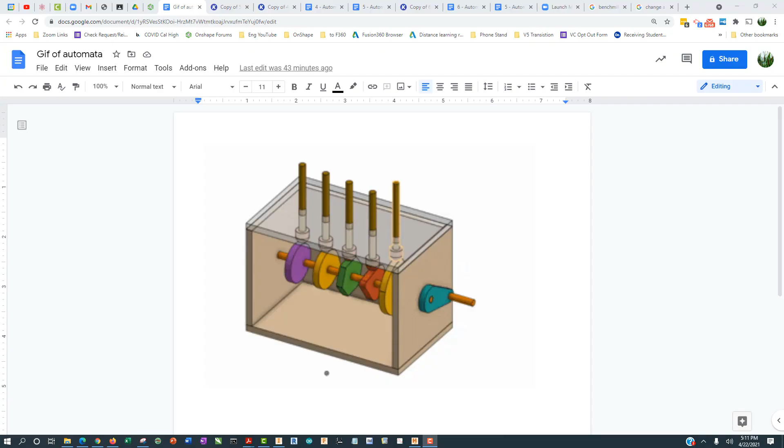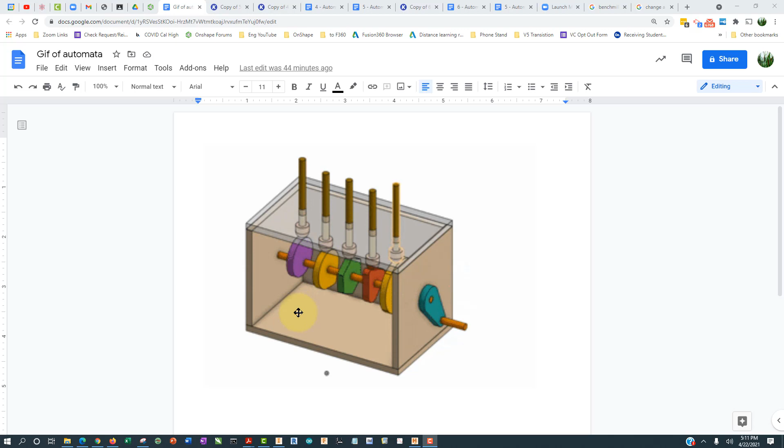In this video, we're going to make the follower system. We've got a rod here, the brown thing - that's going to be a dowel of poplar wood. And then we've got this thing on the bottom, which is going to be 3D printed. That's the follower shoe, and it's going to ride on the cams and generate the motion that we see up here.

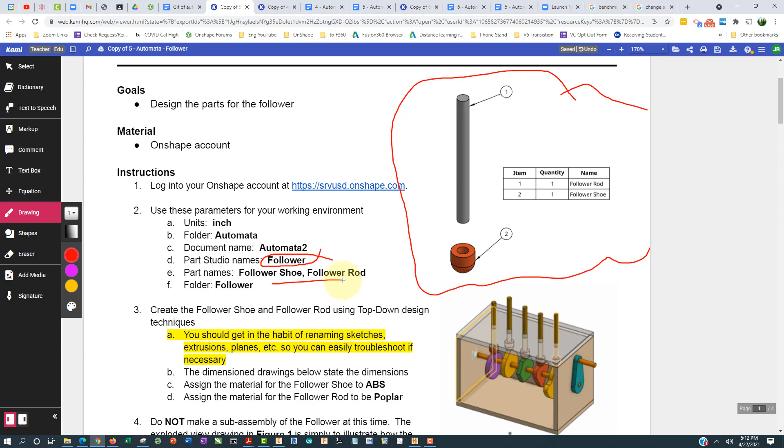So we're going to make two pieces here. On the assignment document, we've got this exploded view of the parts together, and I'd like you to make a new part studio. The parts and all the dimension drawings are here. So let's go ahead and get started.

I'm going to make a sketch on the front plane, and I am going to make the follower shoe first. What I'm going to do is make a sketch that looks something like this, and then I'm going to revolve it around this axis.

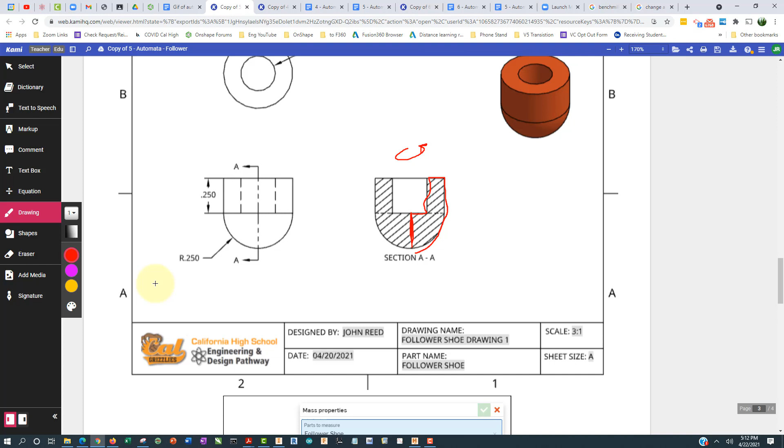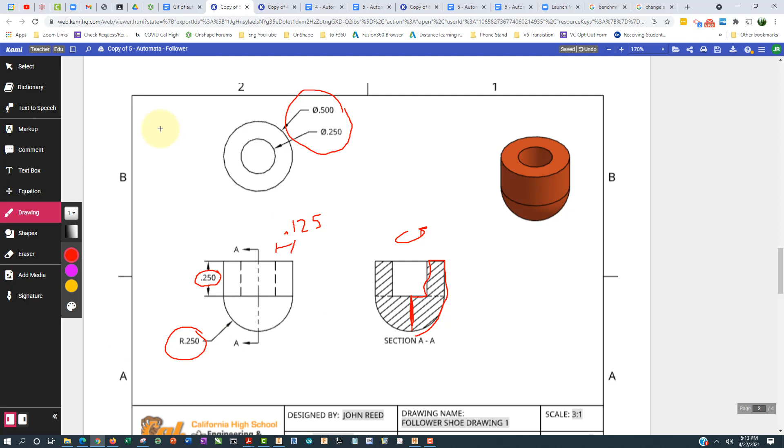This has a radius of 0.25 and 0.25 there. And then since the diameters differ by 0.25, if you think about it, that means that this distance here is going to be half of 0.25, or an eighth, 0.125. Okay, so think about that for a while if it's not clicking, and let's go ahead and make it.

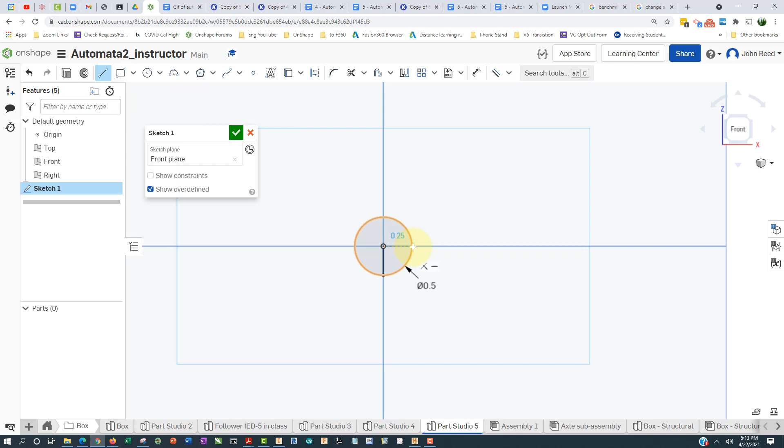So the way I did it was I went ahead and made a circle of diameter 0.5, and then I'm going to draw a line here to there and there to there. Line. There we go, here to here. And then I'm going to get rid of this.

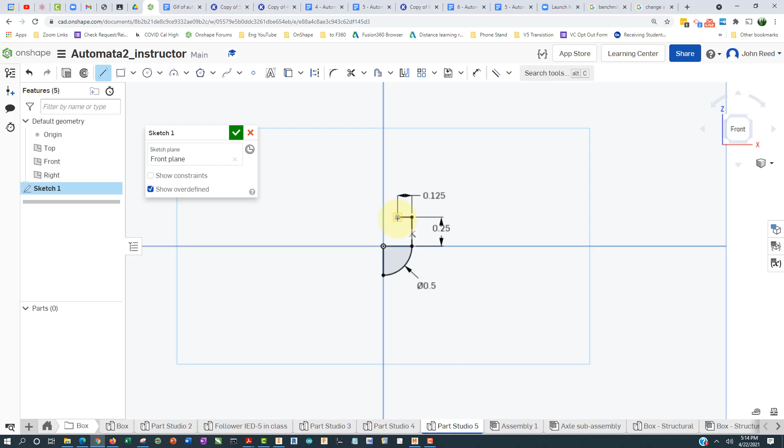And if I come down here, this is going to be 0.25. And this is going to be 0.125. Let's see, finally I'm going to come down to there, and I can trim that. So this is my drawing.

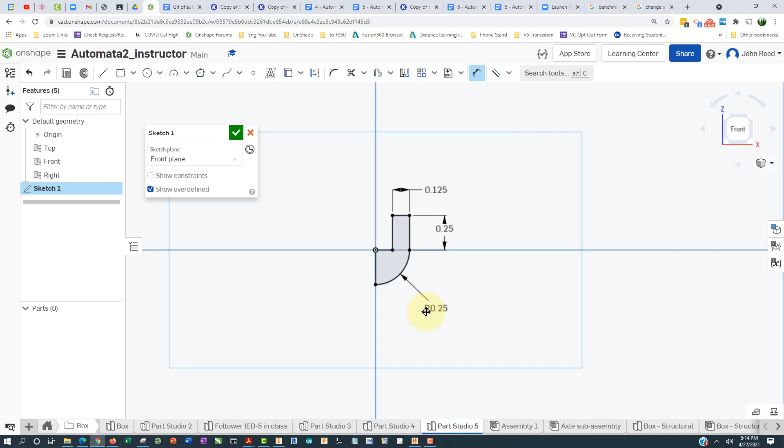And if I want to be technically correct, I can delete this diameter dimension and replace it with a radius, since I no longer have a circle, I have a radius there. So if you compare that to the dimension drawing, I think you'll see that they match up. So let's finish the sketch.

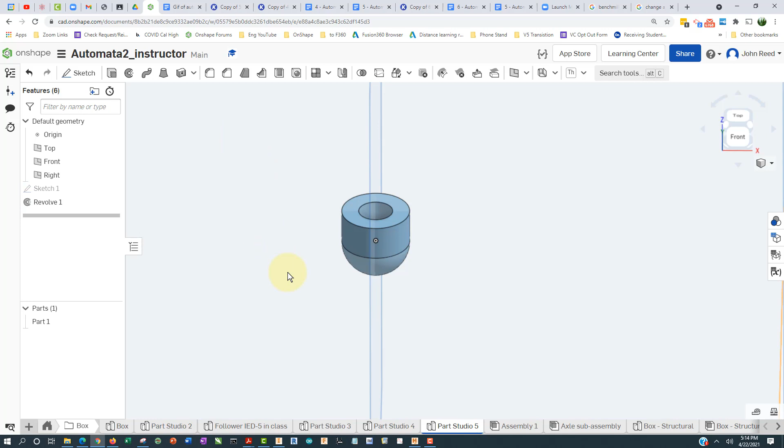And let's see, we're going to revolve that shape around that axis. And we'll take that, and let's rename this follower shoe.

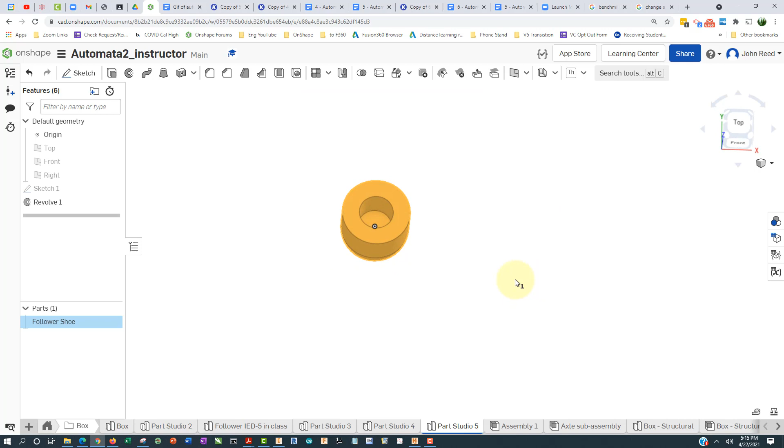All right, and let's see, I think I did quote these numerical values for the volume and the surface area, if you're trying to make sure you get what I got. All right, so that's our follower shoe.

And let's go ahead and assign a material. This is going to be 3D printed, so it's ABS. And let's make it a color that's similar to what we might have in our 3D printer.

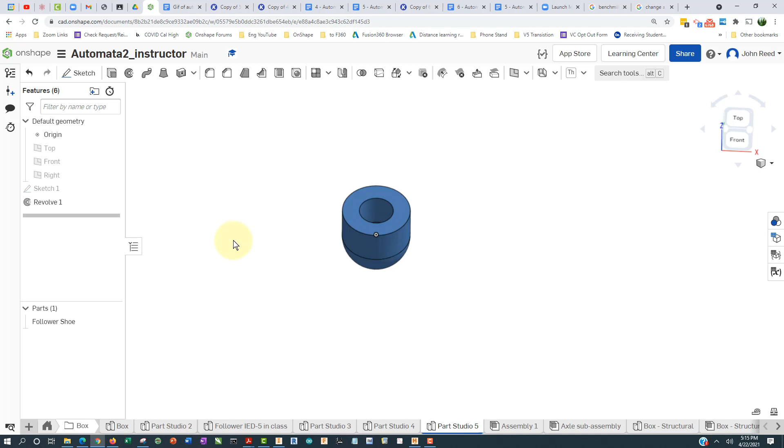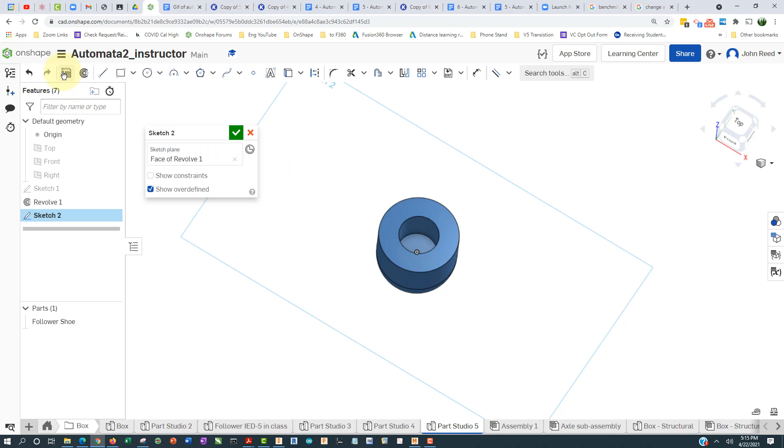Okay, now again we're going to use the existing geometry here to make the rod. So I'm going to make a sketch down in the bottom of the shoe, so it's way down there. The sketch plane is kind of halfway down there. And I think that circle has already automatically been projected onto that sketch plane, so what I think I can do is just extrude immediately out like that.

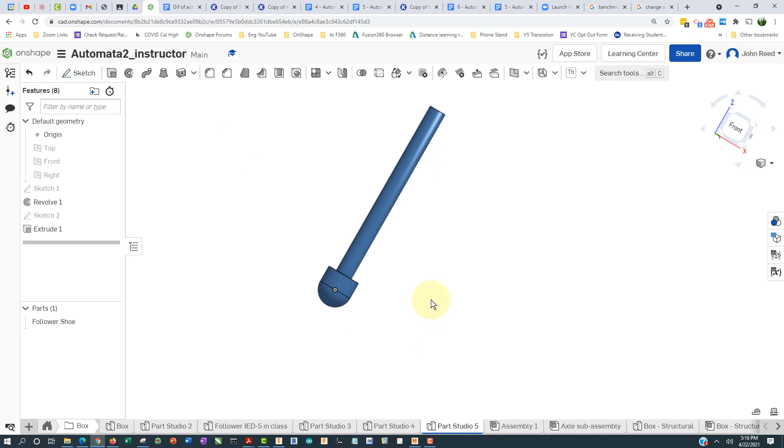Okay, and that's 3 inches per the dimension drawing right there. There we go, 3 inches. And so we'll accept that, except I made a mistake. I want to make a new part with that extrusion. There we go, that's better.

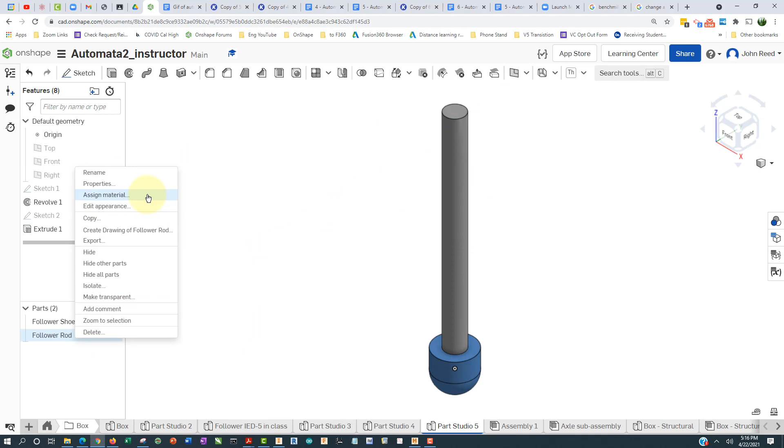So I'm going to name this follower rod, and I am going to change its material to poplar wood, poplar. Okay, and I'm going to give it a color that is somewhat woody. Either one of these will work, it's hard to say. Let's pick that one.

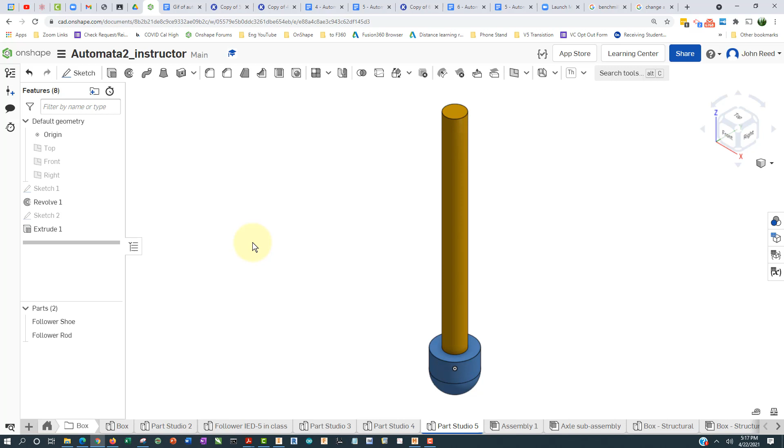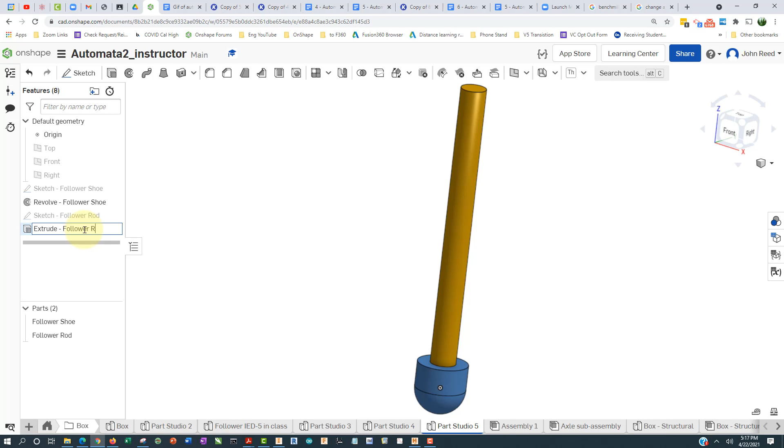And I think that is all we needed to do for this particular assignment - follower shoe. I'm going to go back, and clearly this is not super necessary, renaming all this stuff in the feature list. Let's see, follower rod. But I'm trying to get in the habit of doing that. Follower rod. And it doesn't hurt anything. So there it is.